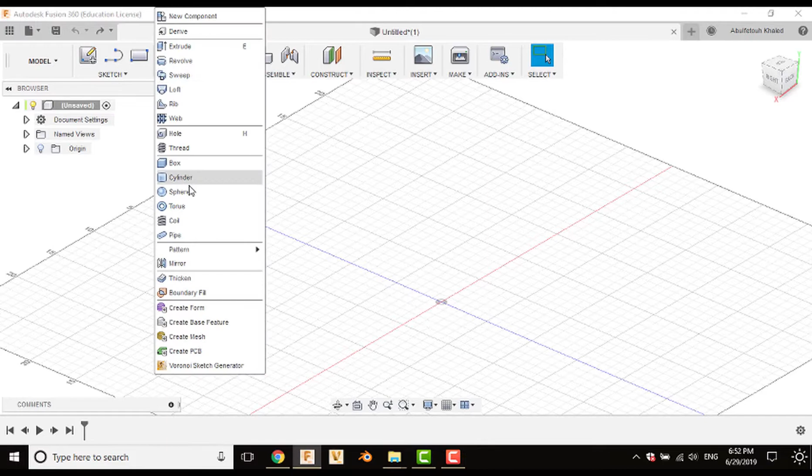First of all, create a cylinder. Then we're going to sketch a circle over the cylinder surfaces, top and bottom. Okay, and a line.

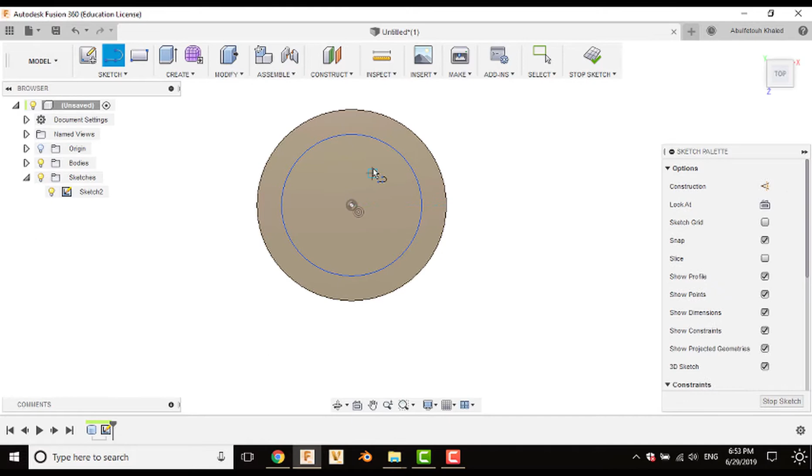Trim that part, I don't need that part. Okay, it's not connected, so we're going to connect it manually. Then trim this part. Start sketch.

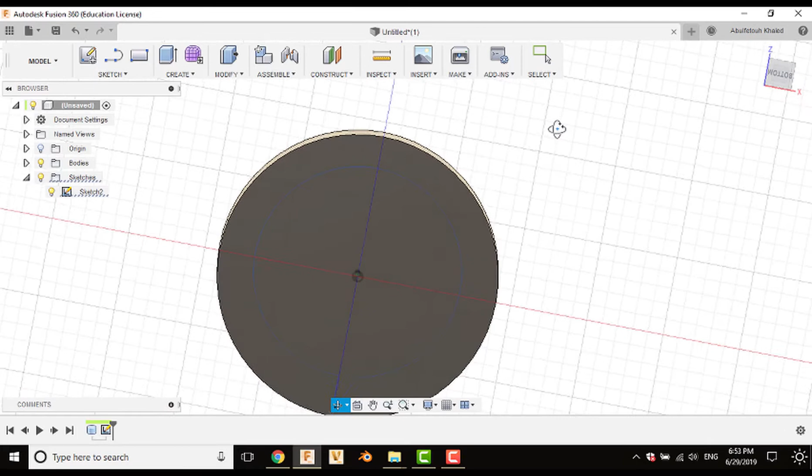In the bottom, let's sketch another one on the bottom. Make sure the circles are matching. Okay, going to sketch another line.

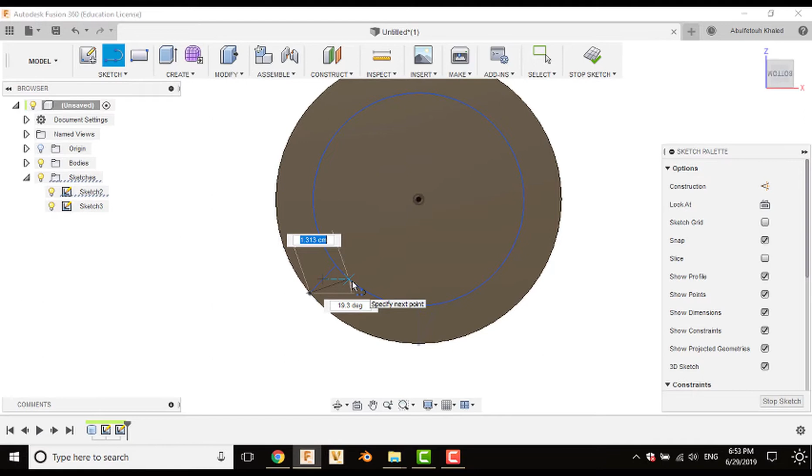Start sketch. I'm going to connect these two points by a line. Make sure that you are using the 3D sketch mode. And connect that part, this point and this point, and it's okay.

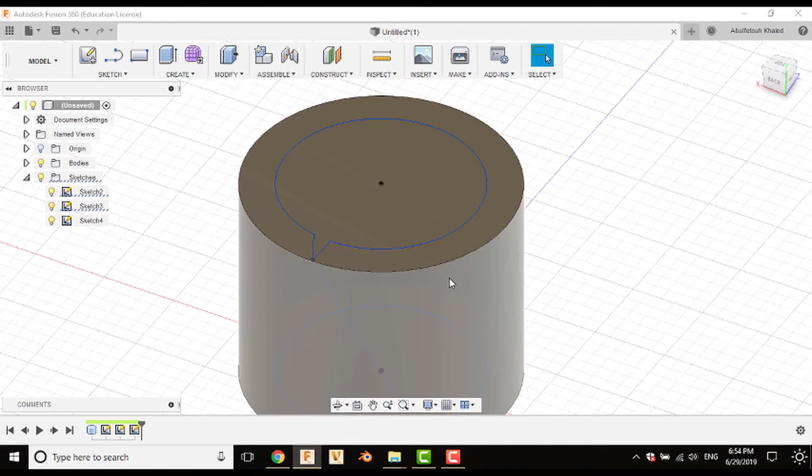And then we're going to project that line over the cylinder surface. Project the surface, choose the plane, choose the face, the curve, and along vector, choose that vector, and stop sketch.

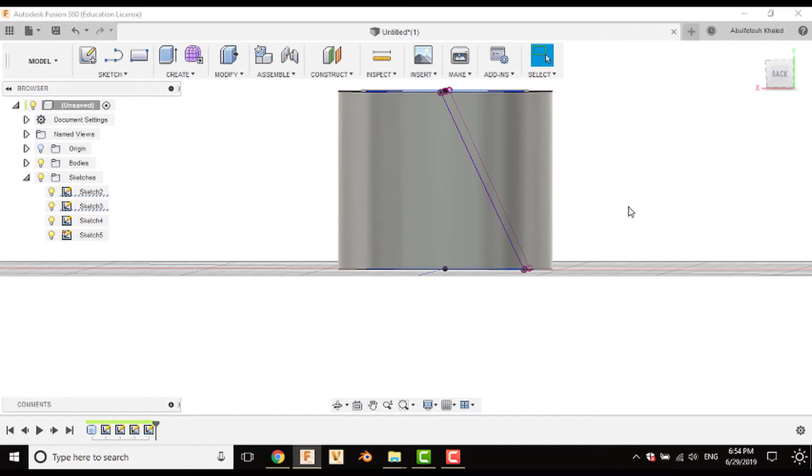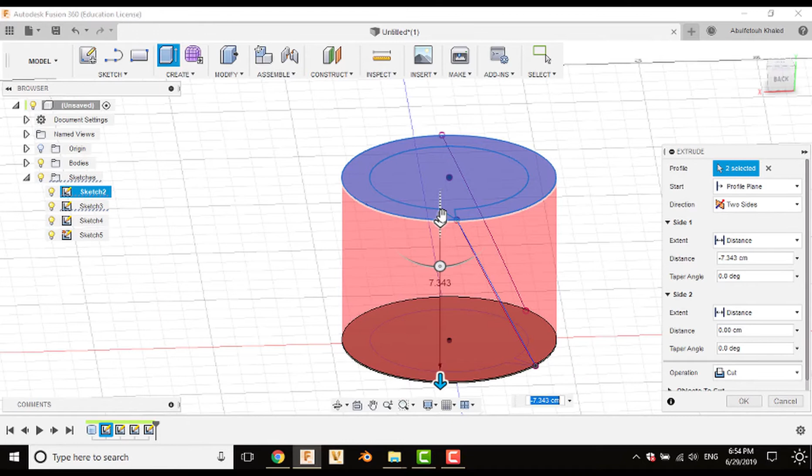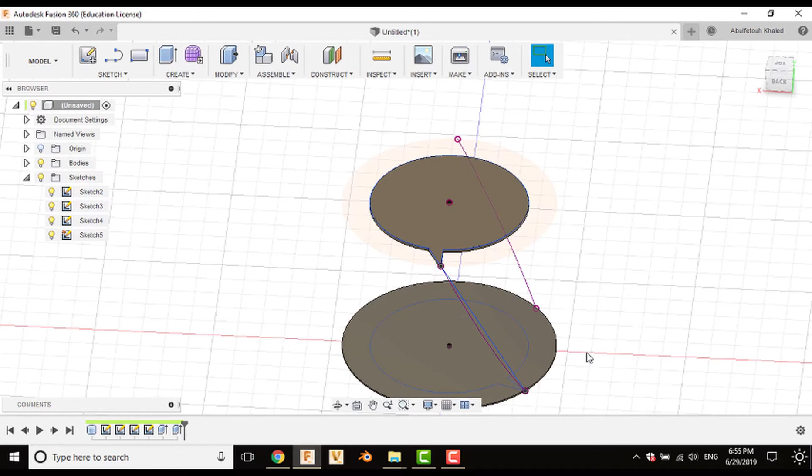And then this part we're going to use the extrude, with 2 directions, 2 sides. Extrude that one. And this one. Extrude this one. And extrude this one.

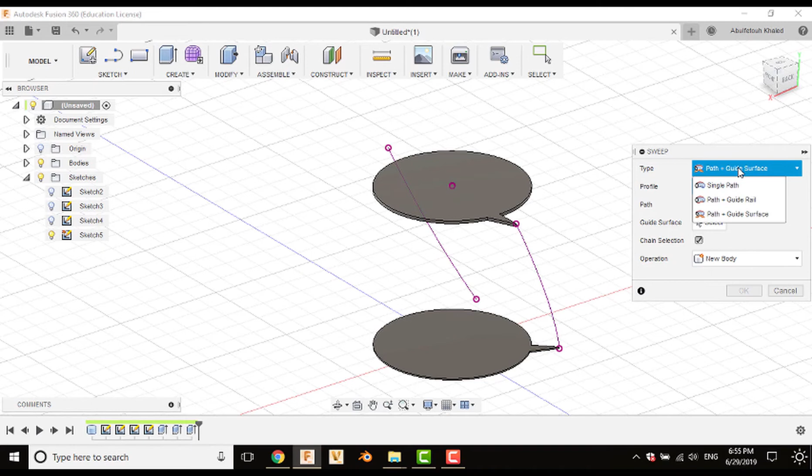Here's the most exciting part. I'm going to create a sweep. Choose that sketch. Going to choose path and guide surface. And choose this profile, this path, this guide surface. Going to use a new body. And click OK.

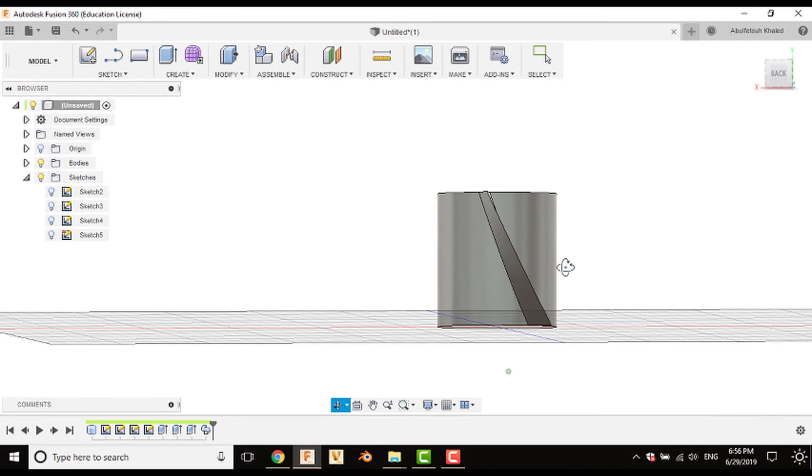Remove that whole bodies. The sweep. It's okay.

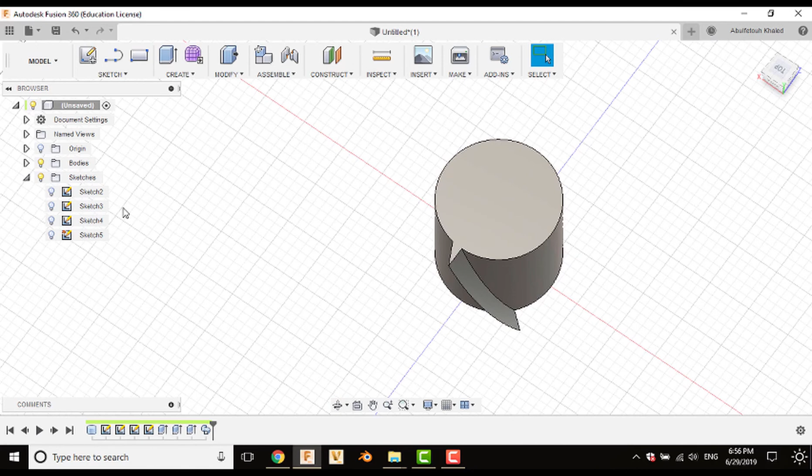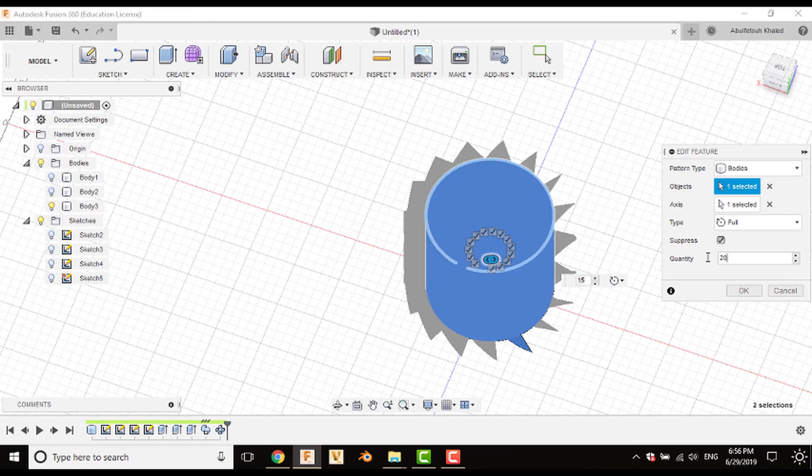Now we're going to make this body using the circular pattern of this body, using this axis. Make it like 15. 15 is okay. Make it like 20. 20 is very okay.

And then modify, combine, and join.

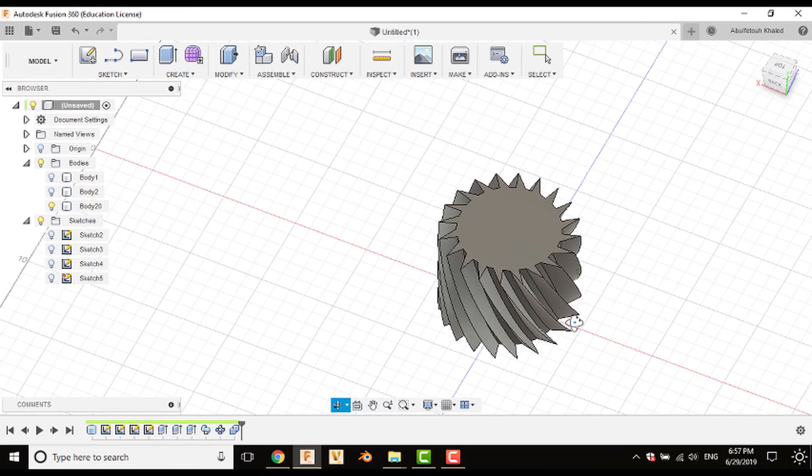It just became a nice helical gear in a few simple steps, less than 5 minutes.